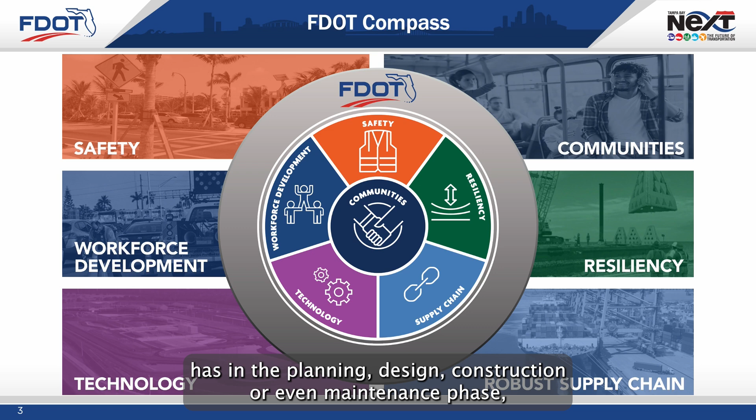With all projects FDOT has in the planning, design, construction, or even maintenance phase, we are focused on incorporating each element of the FDOT compass, including resiliency, safety, and technology, in order to provide communities with projects that improve everyday lives.

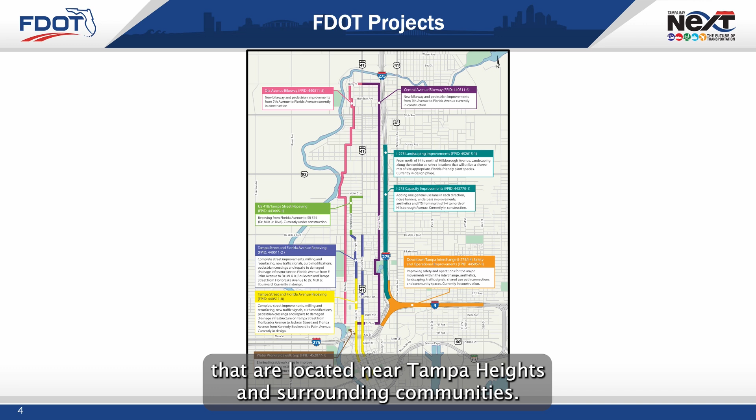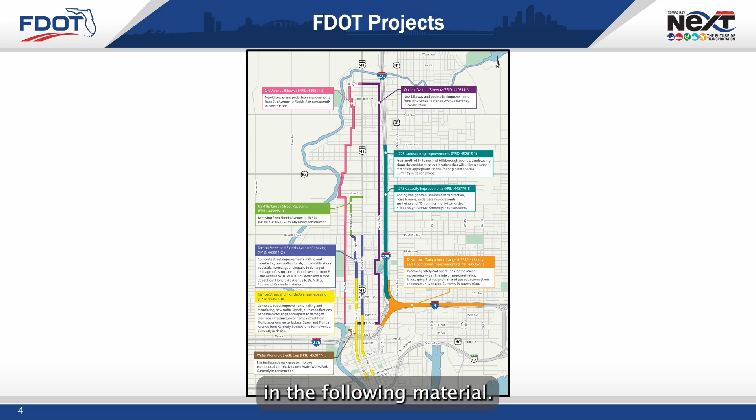FDOT has several projects, as shown on this map, that are located near Tampa Heights and surrounding communities. These projects are either in the design phase or currently under construction. This presentation will provide additional information on each project in the following material. The next portion of the presentation will provide an update on construction projects along arterial roadways in the community.

FDOT has been engaging with the community for many years on bicycle and pedestrian improvements they wish to see. Two bikeways are currently in construction along Ola and Central Avenues. These projects will construct traffic calming features to reduce the speed of vehicles and to allow for the roadway lanes to be shared by both vehicular drivers and bicyclists.

Construction kicked off in the fall of 2024, and improvements being completed include modifying intersections, modifying sidewalks and ADA ramps, and painting new striping for crosswalks. Bulb outs are being constructed to accommodate on-street parking and to provide a safe refuge for pedestrians.

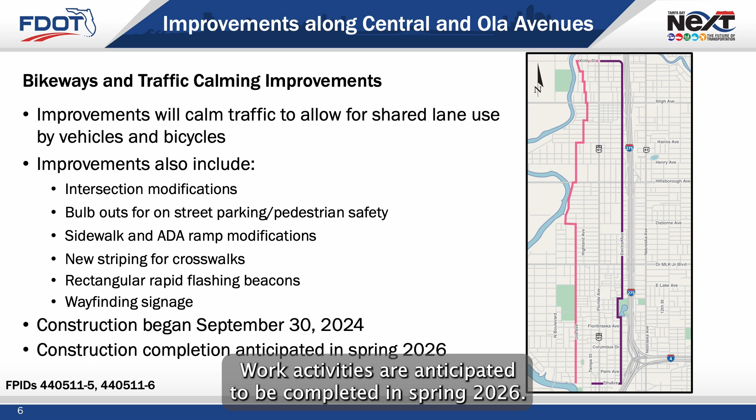Additionally, rectangular rapid flashing beacons, or RRFBs, are being installed along with new wayfinding signage. Improvements along both corridors are being completed as one project. Work activities are anticipated to be completed in spring 2026.

Along Central Avenue, the traffic calming elements include reduced travel lane widths, bike lanes, lateral shifts, concrete medians, and chicanes, raised crosswalks, speed tables and speed cushions, bulb outs with chicanes, and on-street parking. RRFBs will be installed for pedestrian crossing along Central Avenue at Palm Avenue, Columbus Drive, Fern Street, and Flora Street.

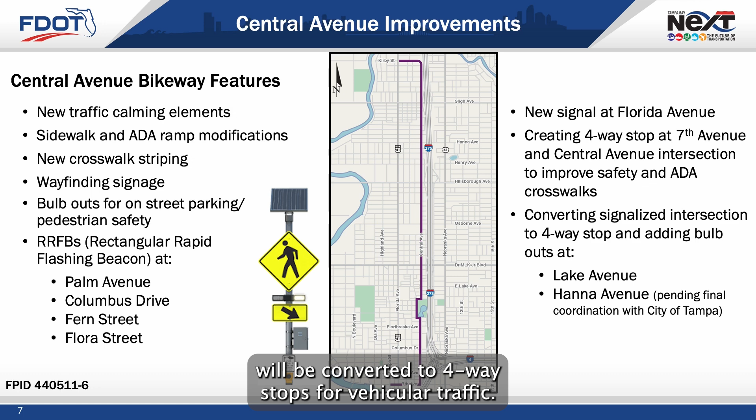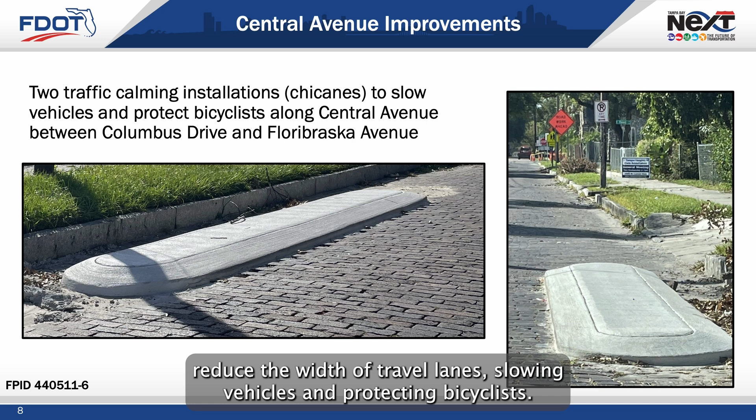Some of the most visible work activities along Central Avenue have been the installation of the traffic calming chicanes, which reduce the width of travel lanes, slowing vehicles and protecting bicyclists. Along Ola Avenue, similar improvements are being made to slow traffic, add the bikeway, and improve safety for bicyclists and pedestrians. Speed cushions are being added between Columbus Drive and south of Osborne Avenue.

And there will be 2 new 4-way stops created at the intersection of Ola Avenue and Osborne Avenue, and the intersection of Highland Avenue and West Lambert Street. Pedestrians will see improvements including a new RRFB at Ola Avenue and Columbus Drive, a new traffic signal at Ola Avenue and MLK Boulevard, as well as a pedestrian hybrid beacon at the intersection of Ola and Sligh Avenues. Along the corridor, FDOT will upgrade the curb ramps and add marked crosswalks and intersection lighting.

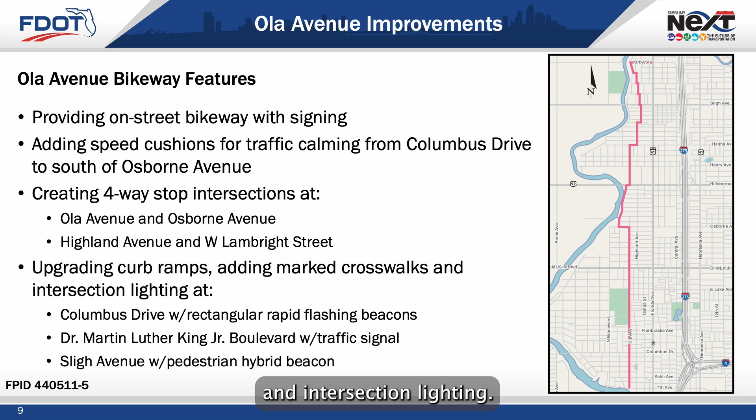The Waterworks Sidewalk Gap project will enhance multimodal connectivity by eliminating sidewalk gaps within the Tampa Heights district along I-275 near Water Works Park. A sidewalk connection is being added from the west side of Tampa Street, just north of Kay Street, and will run along the north side of the I-275 exit ramp, connecting to Doyle-Carlton Drive.

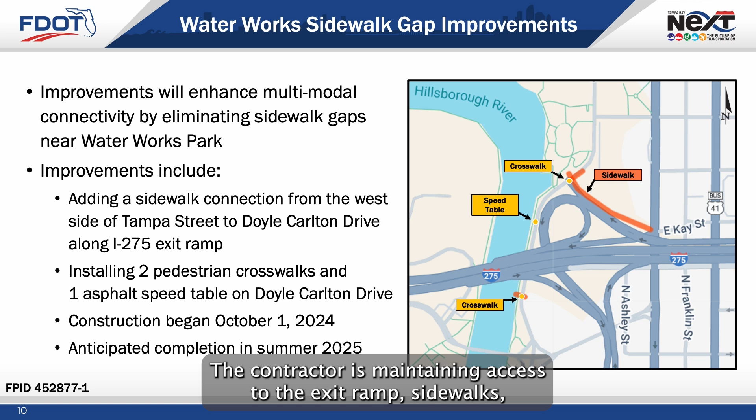In addition, 2 pedestrian crosswalks are being installed across Doyle-Carlton Drive, to the north and south of I-275, and an asphalt speed table is being added to Doyle-Carlton Drive south of the Waterworks Park. Construction activities are taking place during the day and at night. Any work requiring lane closures will occur at night from 6 p.m. to 7 a.m. The contractor is maintaining access to the exit ramp, sidewalks, driveways, and side streets.

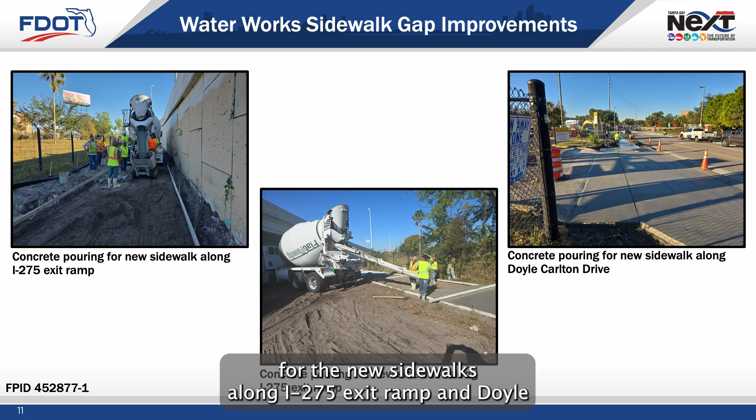The images show the ongoing work, including the pouring of concrete for the new sidewalks along I-275 exit ramp and Doyle-Carlton Drive.

The Highland Avenue repaving project will begin this spring. The project will be repaving Highland Avenue and a portion of Violet Street from Florida Avenue to MLK Boulevard. To stay up to date with work or to sign up for alerts, visit FDOTTampaBay.com.

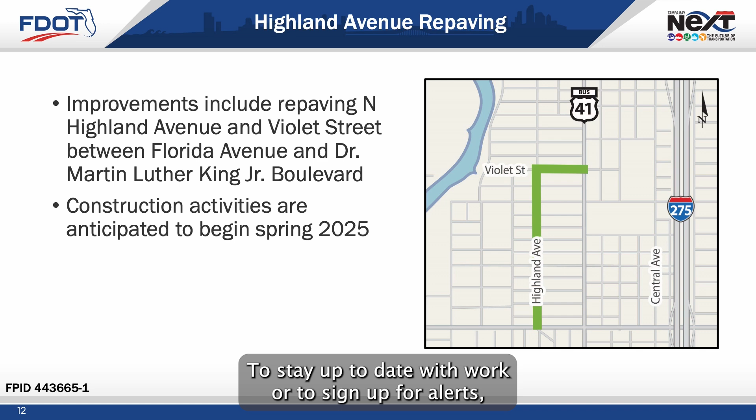The next section of the presentation includes updates on projects along arterial roadways that are currently in the design phase. FDOT has been coordinating with the City of Tampa and the Hillsborough Area Regional Transit Authority on planned improvements along Tampa Street and Florida Avenue, which will accommodate both complete street elements and future transit projects. FDOT has 2 projects along these corridors, shown on the map.

Both projects will include milling and resurfacing the roadway, installing new traffic signals, and repairing drainage infrastructure that has been damaged. The complete street improvements include adding new pedestrian crossings, reconstructing substandard curb ramps, replacing damaged sidewalks, constructing bulb outs in areas with on-street parking, and relocating the curb line to widen the sidewalk on the east side of Tampa Street.

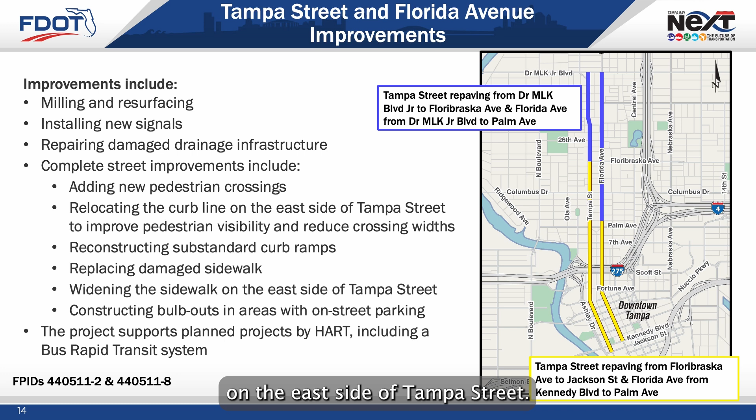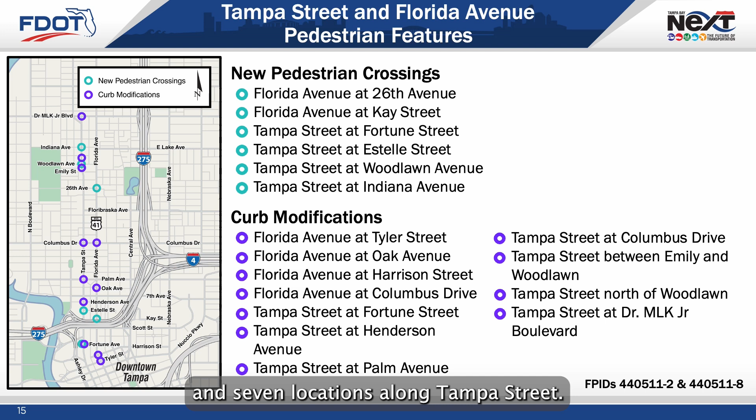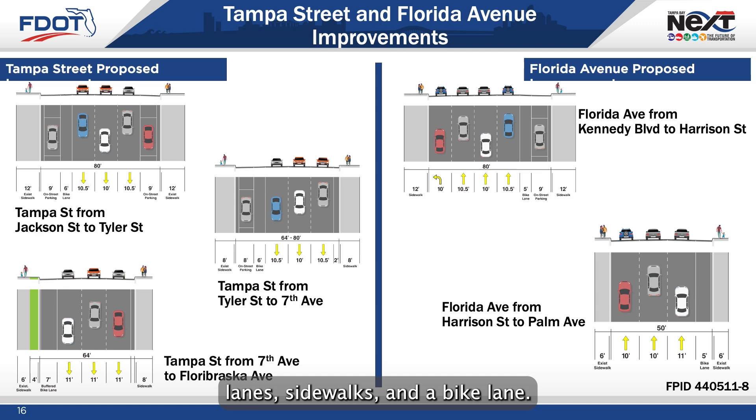The typical sections shown denote the complete streets improvements planned along both Tampa Street and Florida Avenue. Similar to the planned improvements to the south, the typical sections along Tampa Street and Florida Avenue vary, but all accommodate sidewalks, 3 travel lanes, and a bike lane.

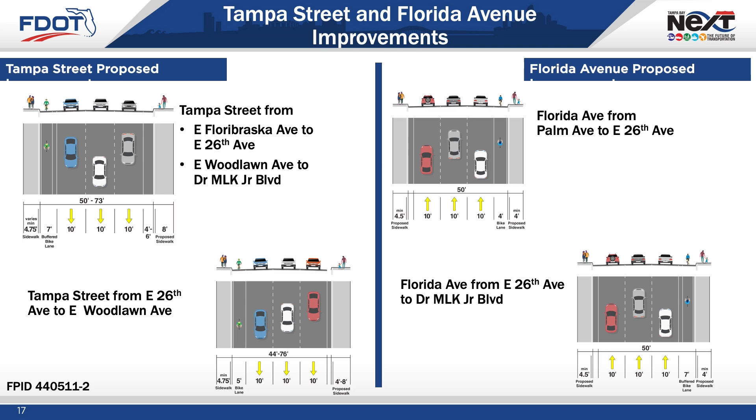The next section of the presentation will focus on current construction projects on Interstate 275 and Interstate 4 near downtown Tampa. The Downtown Tampa Interchange, or I-275/I-4 interchange, began construction activities in fall 2023. The project is making improvements to the major movements within the interchange. These improvements include constructing a new 2-lane exit ramp from southbound I-275 to eastbound I-4. Drivers will use the new flyover bridge to access eastbound I-4, and the existing flyover bridge structure will be used to access the relocated exit to 14th and 15th Streets.

13th Avenue will be widened to 2 lanes, improving access to 21st and 22nd Streets. The ramp from westbound I-4 to northbound I-275 will be widened from 1 to 2 lanes, while providing an additional merge lane on northbound I-275 to north of the Dr. Martin Luther King Jr. Boulevard exit. Additionally, the improvements will widen the westbound I-4 to southbound I-275 exit from 2 to 3 lanes and widen the shoulders on southbound I-275 from Palm Avenue to Jefferson Street.

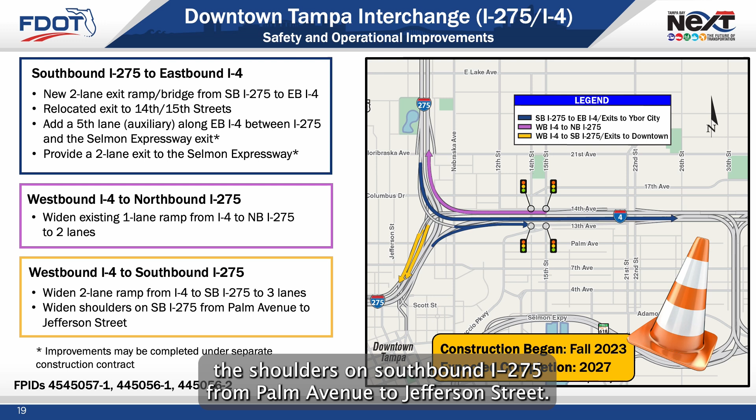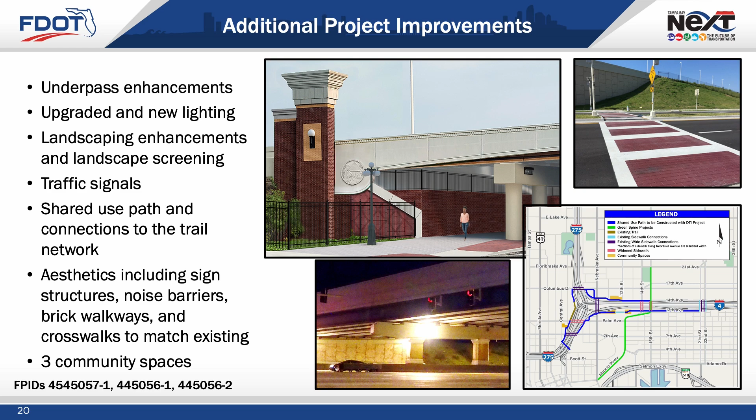The project includes non-roadway improvements such as underpass enhancements, upgrading lighting, new lighting, signs, landscaping, traffic signals, a shared use path and connections to the existing network, aesthetic treatments, and community spaces. Current construction activities are well underway for the I-275/I-4 interchange project. The micro-tunneling activities wrapped up and currently manhole structures are being installed. The contractor is removing old storm drainage and installing new temporary and permanent drainage.

Other work activities include utility relocations, construction of footings and columns for the bridge widenings, gravity walls and bridge deck widenings at both 14th and 15th Streets, construction of embankment for the new exit from northbound I-275 to Ybor City, located near 12th Avenue, construction of mechanically stabilized earth or MSE retaining walls and slope pavement, and substructure work for the new flyover bridge from southbound I-275 to eastbound I-4. The contractor will also demolish the barrier wall to prepare for drilled shafts for overhead signs.

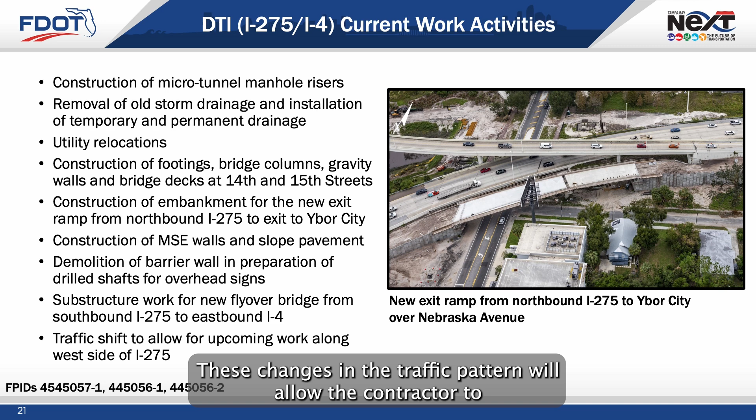The projects will have traffic shifts for the downtown Tampa exit ramps in January that drivers should be aware of. These changes in the traffic pattern will allow the contractor to begin work activities on the west side of I-275 in coming months.

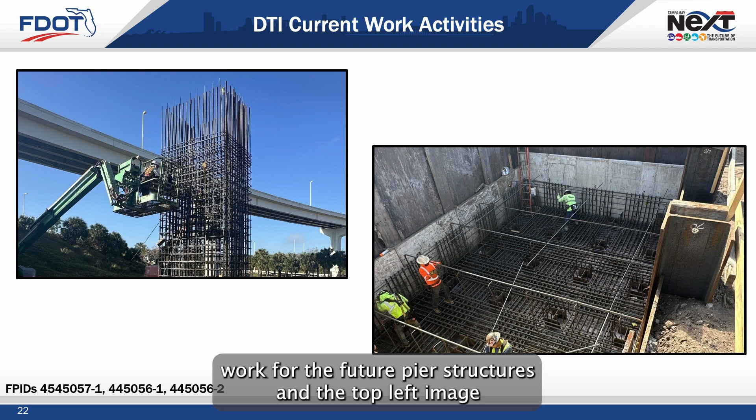Work activities continue on the future flyover ramp from southbound I-275 to eastbound I-4. The images shown depict this work. The bottom right image shows the foundation work for the future pier structures, and the top left image shows the rebar installation for the future pier structure.

If you have driven along the I-275 corridor north of downtown Tampa, it's likely you have seen the progress made on the I-275 capacity improvements project that extends from north of I-4 to north of Hillsborough Avenue. Construction kicked off in October 2021, and improvements include widening I-275, both to the inside and outside, to construct one additional general use lane in each direction and provide wide shoulders along the project limits.

Additional improvements include the construction of noise barrier walls, the installation of new signage, and improved lighting. FDOT has been working with the community and the City of Tampa on pedestrian and underpass improvements that include wide sidewalks and aesthetic treatments at several locations.

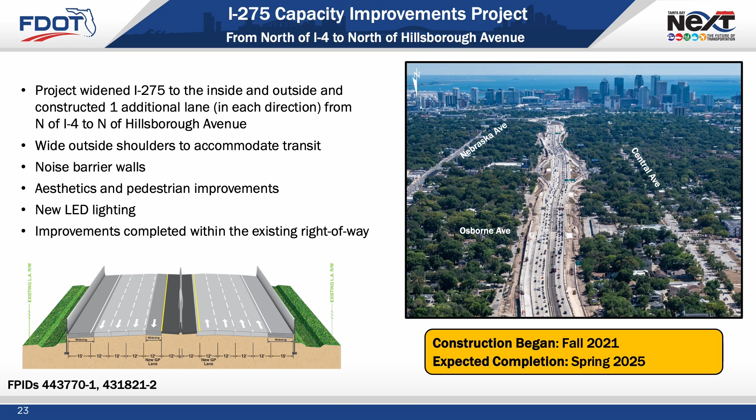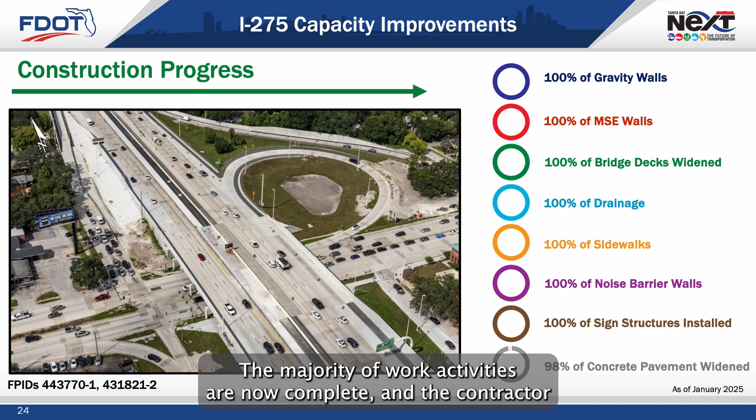The project was originally anticipated to be complete in 2026, and it is now anticipated that construction will be completed this spring. This image shows the improvements near Hillsborough Avenue along I-275, which included widening the bridge deck over Hillsborough Avenue, as well as I-275 to the north and south to add an additional lane in each direction. The majority of work activities are now complete, and the contractor will be finalizing the outstanding work in the coming months.

Some of the current work taking place includes completing work within the median between Dr. Martin Luther King Jr. Boulevard and Floribraska Avenue. These work activities include completion of the concrete median wall, the asphalt shoulders, and concrete paving.

Work along the side streets and at underpasses continues with the installation of luminaires, the installation of fencing on top of the gravity walls at underpasses, the installation of bridge clearance signs for drivers, and painting. Additionally, intelligent transportation systems, or ITS devices, continue to be installed along the corridor.

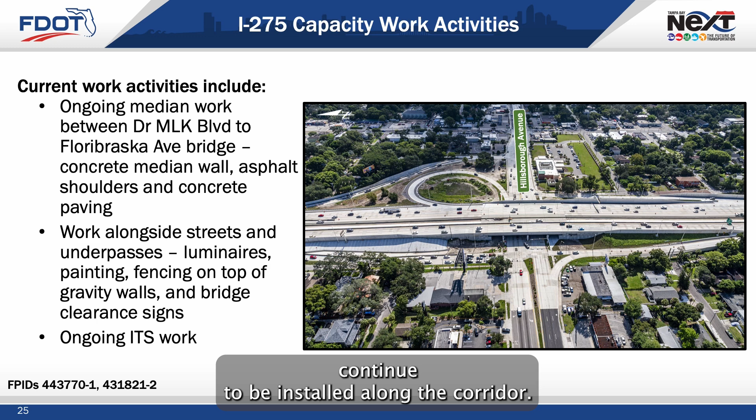As construction nears completion along I-275 from north of I-4 to Hillsborough Avenue, the development of the concept plans for landscaping are currently in the design phase. The concept plans identify locations where landscaping will be installed. The landscape design will utilize a diverse mix of site-appropriate, Florida-friendly plant species that will increase the tree canopy and complement the roadway aesthetics while prioritizing public safety.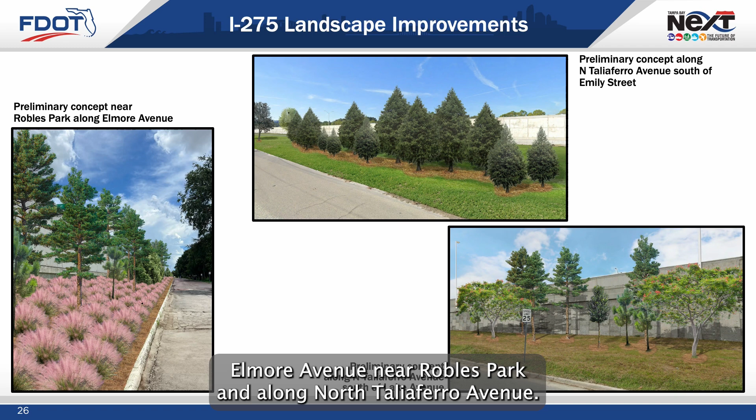The images shown depict the draft concept plans for landscaping along Elmore Avenue, near Robles Park, and along North Taliaferro Avenue. The images shown here depict draft landscape plans near the northbound and southbound on-ramps from Hillsborough Avenue. Please note that the landscape plans are not yet finalized and may be modified as design nears completion. Construction is anticipated to begin in early 2026. For additional details, a roll plot is available for viewing at this meeting and online.

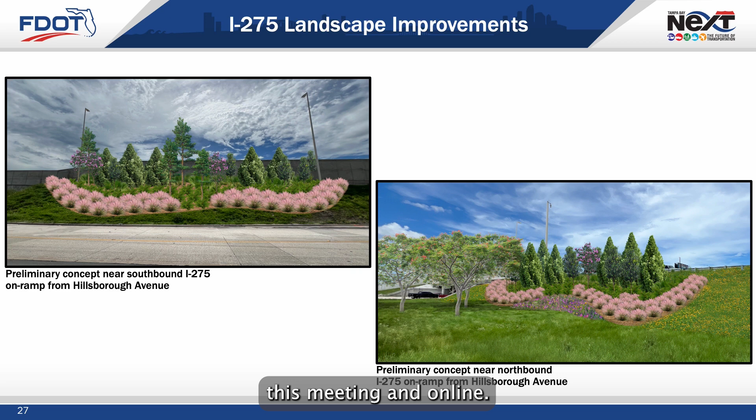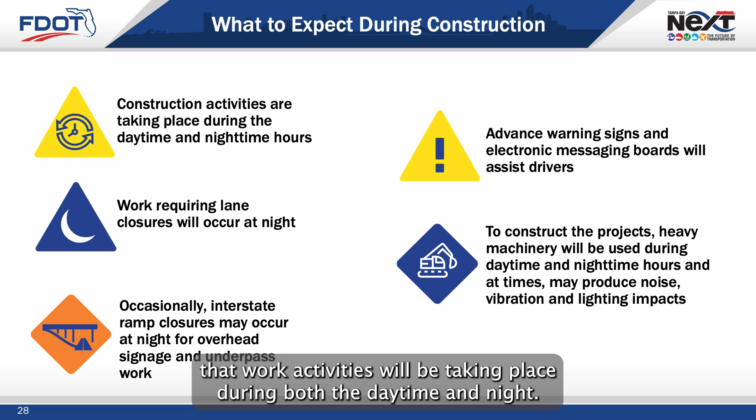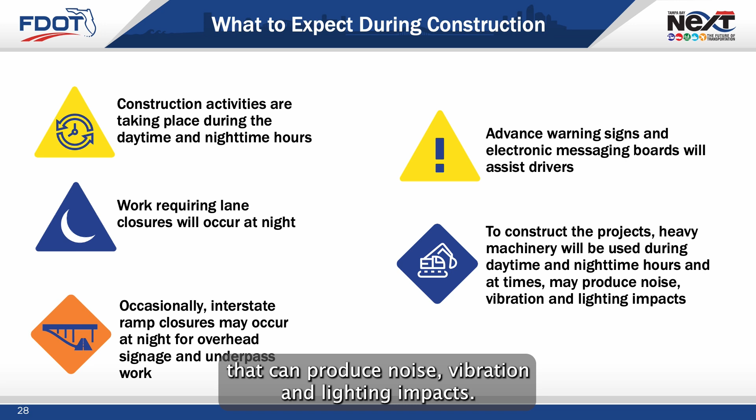Please remember that as FDOT continues to progress on projects both along arterial roadways and the interstate, work activities will be taking place during both the daytime and at night. Any work that requires lane closures will occur at night, and occasionally this work may require the closure of interstate ramps. Work activities may require the use of heavy machinery that can produce noise, vibration, and lighting impacts. Please remember to pay attention to advance warning signs and electronic messaging boards.

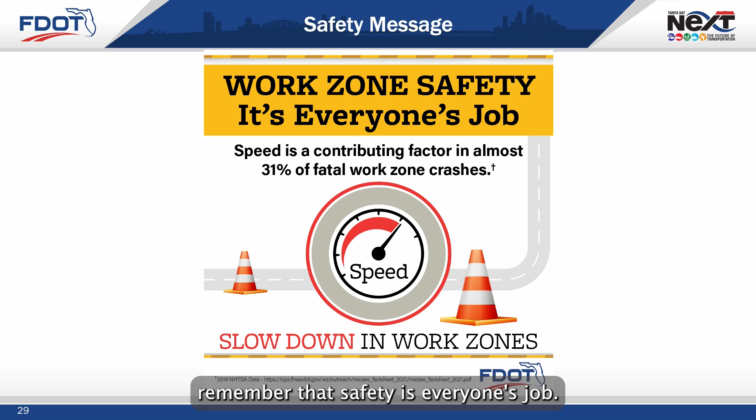As a community, it's important that we all pay attention and use caution. Whenever you drive, and especially in work zones, remember that safety is everyone's job. Please slow down in work zones to keep you and workers safe.